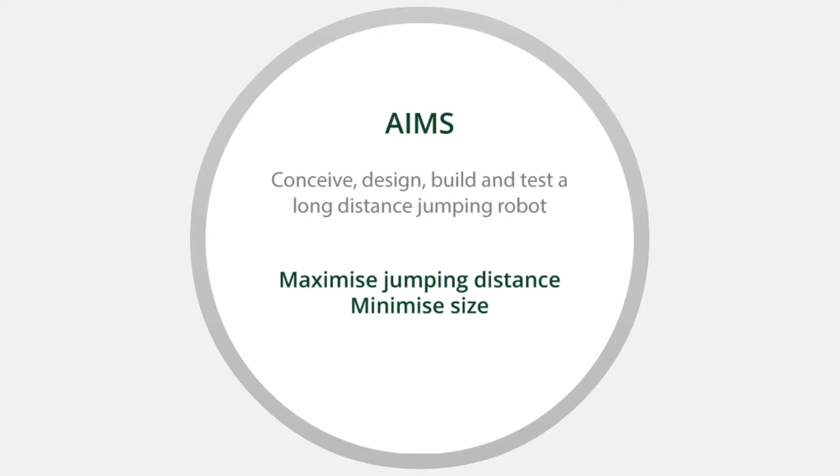The main aim of this project is to design and construct a lightweight jumping robot, maximizing horizontal distance. It was noted that all designs analyzed were bio-inspired. The basic jumping motion consists of the application of force from a body against a substrate, which produces a reaction force. This reaction force then propels the body forward. Stored strain energy is converted into kinetic energy for launch.

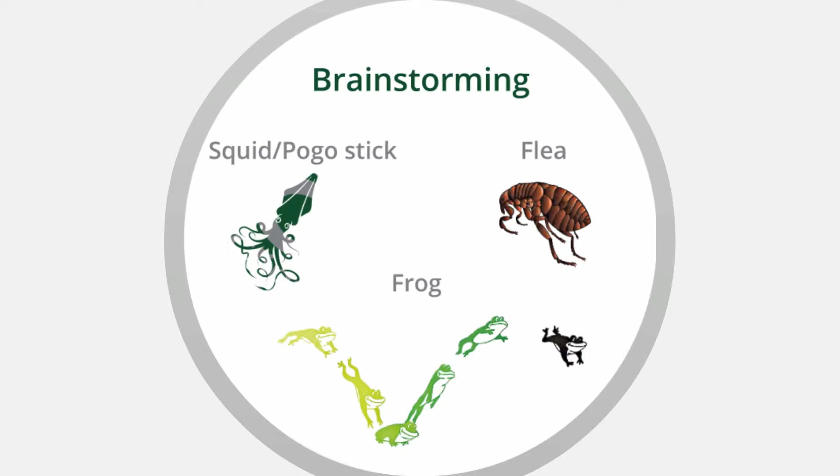These 3 designs were our main source of inspiration. From these designs, we obtained multiple design considerations. We analyzed 3 potential mechanisms: a piston spring system, which involves the compression of a linear spring, a mechanism in which torsional springs are charged by a cam, and a pulley lever system, which also employs torsional springs. 2-legged and 3-legged designs were considered.

Structural leg designs factored in both balance and stability, while also sustaining body forces and the forces exerted during takeoff and landing. Based on the materials available, we considered ABS plastic for the main body, frame and legs, nylon rope for the pulley system, and carbon rods for all the shafts. Pre-manufactured plastic gears were utilized in our robot.

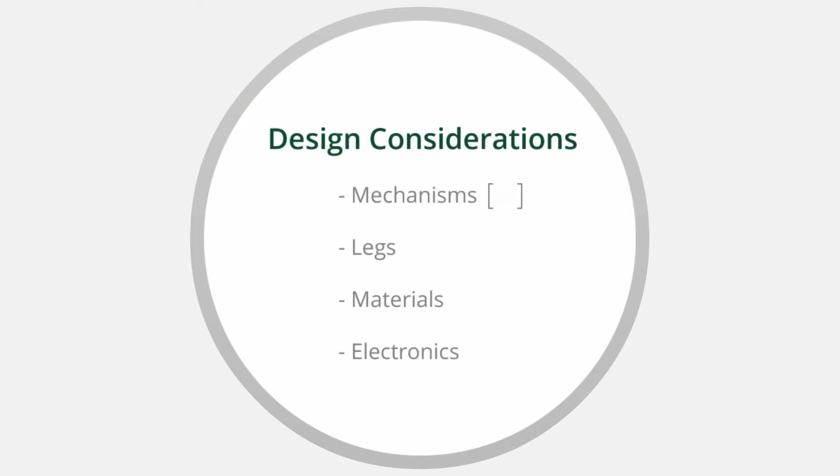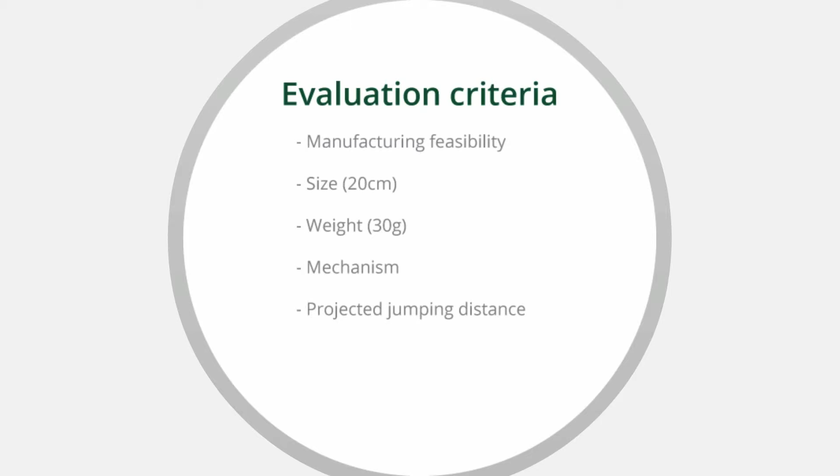For the electronic setup, a basic DC motor, LiPo batteries, and a PCB board configuration is employed. An infrared transmitter-receiver system is utilized to remotely control the robot. Based on the design brief, a 5-point evaluation criteria was developed. This was applied to each potential robot design, and the best design concept was selected. The selected concept was inspired by the MSU robot.

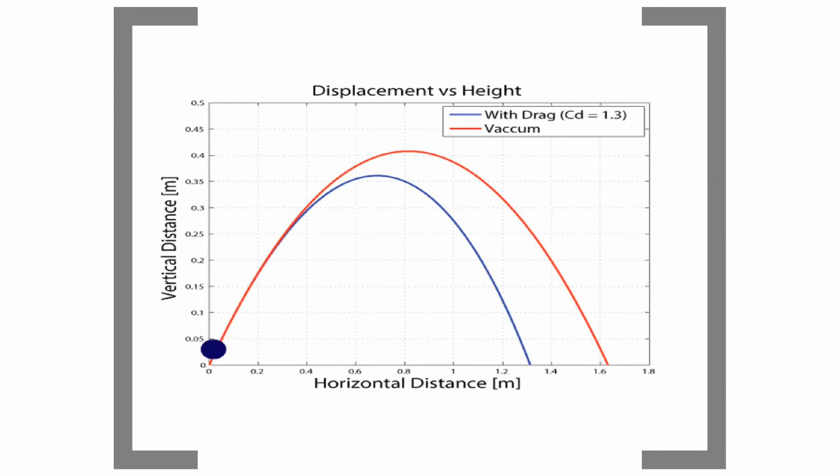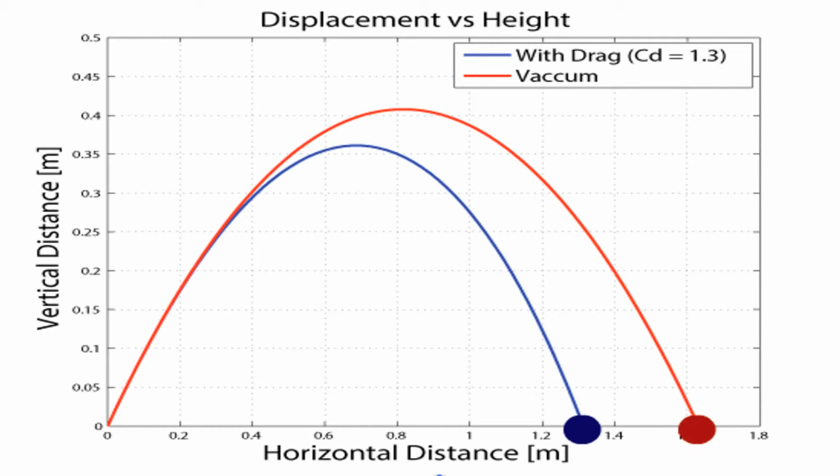Initial math model. The expected trajectory based on projectile motion of our robot was modeled using estimated parameters and an iterative 4th-order Runge-Kutta numerical solver. This involves the Cd, which was taken as 1.3 based on numerous data findings. For the initial analysis, the robot was represented as a cylinder with a diameter of 5 cm, height 10 cm, and a mass of 20 grams, and an initial launch angle of 45 degrees. The initial velocity was taken as 4 meters per second. It was assumed the density was constant.

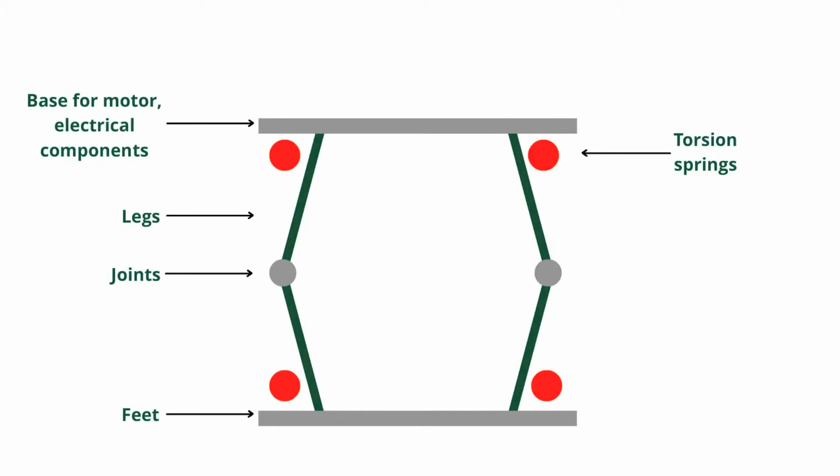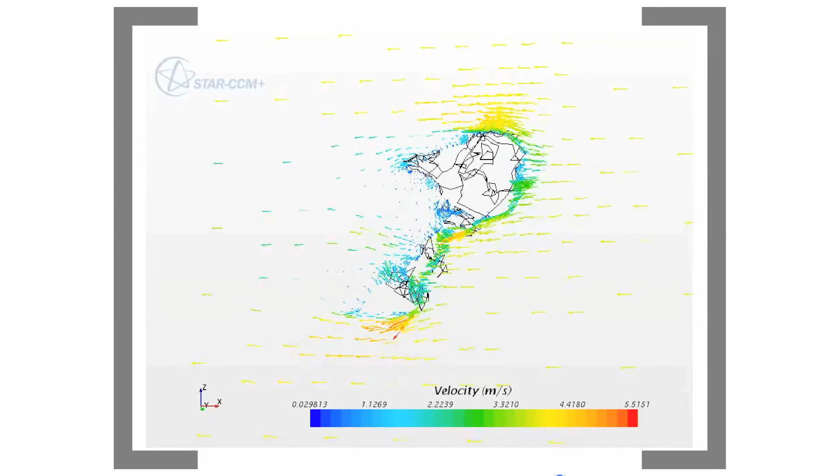CAD. 8 torsion springs are utilized in our design. These are charged when the body moves down. The legs contain joints which facilitate bending. The base of our robot was designed as an inclined plane to enable projectile motion. As the rotation link spins in a clockwise direction, it pulls the cable along. Since the foot is fixed, the body is forced down. When the cable is pulled taut just past the critical position, the link falls rapidly and the springs decompress, releasing energy which results in upward acceleration of the body.

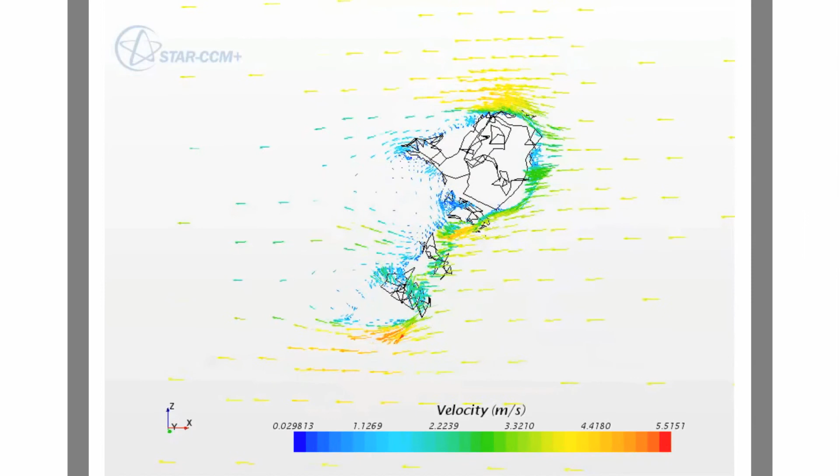CFD. For the CFD analysis, we compared the expected drag based on the cylinder model of our robot to that of the actual robot. The CD of the robot was found to be significantly lower than the cylindrical value. CD of the robot is 0.24. Stress simulation. It was found that our design is very safe. The static stresses in the main body and the legs are well below the yield stress.

Current math model. Our initial robot design was slightly overweight, and therefore the dimensions and configuration were optimized to reduce mass. Using the new CD value obtained from CFD analysis for our robot and new design parameters, the expected trajectory was obtained.